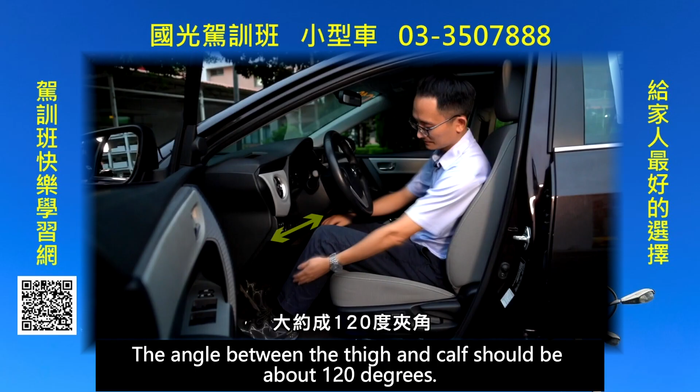The first step in adjusting the correct seating position is to adjust the seat forward and backward, and its height. The guideline is that both feet should not touch the lower edge of the platform, and your foot should rest lightly on the brake pedal. The angle between the thigh and calf should be about 120 degrees. This way, you can provide enough braking force, and the transition between the accelerator and brake pedals will be very smooth.

As for the height adjustment of the seat, it should be as close to the ground as possible, while ensuring a clear line of sight. This way, the center of gravity is lower, which improves vehicle control. When the driver's seat safety airbag inflates, if the driver is too close, it can cause serious injuries. It is recommended to sit at least 25 centimeters away from the airbag.

The distance is measured from the center of the steering wheel to your sternum. Additionally, the closer the headrest is, the better head protection you will have. Therefore, it's not advisable to use a cushion on the seat back.

Teacher, I would like to ask how to adjust the rearview mirror. Not adjusting the rearview mirror before driving will prevent a complete understanding of the vehicles on both sides and behind. When turning or changing lanes, it can easily lead to misjudgments regarding the presence of other vehicles, causing traffic accidents.

Furthermore, the cleanliness of the mirrors should also be noted. The interior rearview mirror should primarily provide a view directly behind. It is recommended that in adjusting the side rearview mirrors, 1/5 of the inner circular part of the mirror should show your vehicle. The remaining part should show what is behind the vehicle and the status on the side of the vehicle. Teacher, I have one last question.

How should the steering wheel be adjusted? If the steering wheel is not properly adjusted, it will affect our steering maneuverability and can create ergonomically incorrect movements, leading to hand, back, and shoulder soreness. This is not good for long-distance driving.

After watching the video, let's move on to our course: understanding vehicle structure, the driver's cabin, and the dashboard.

We see this diagram. There are two dashboards above. The one above is a typical fuel vehicle dashboard, and the one below is a hybrid vehicle dashboard. What's the difference?

It has an engine RPM gauge. Everything else is about the same. Each type of vehicle's dashboard is generally similar. However, the more warning lights there are on the dashboard, the more testing systems it will have.

The color distinctions generally include blue, green, yellow, and then red. Generally speaking, the red part means you need to address it immediately. The yellow part can usually wait to be addressed. Green indicates normal, you probably don't need to deal with it right away. Green represents normal. There are about these colors.

Let's take a look. The remote control part is the remote control on your body. As long as you get close to the car door, that door handle can open the car door. Its design is the door handle; it has a sensor that can detect you. If the remote is on you, the car door can be opened, and if you touch it again, it will close the car door. You can also use the button.

There are buttons on the remote, and the remote has a key on it. Why is there a key? Because it's worried the remote might be out of battery. You can use this key to open the car door.

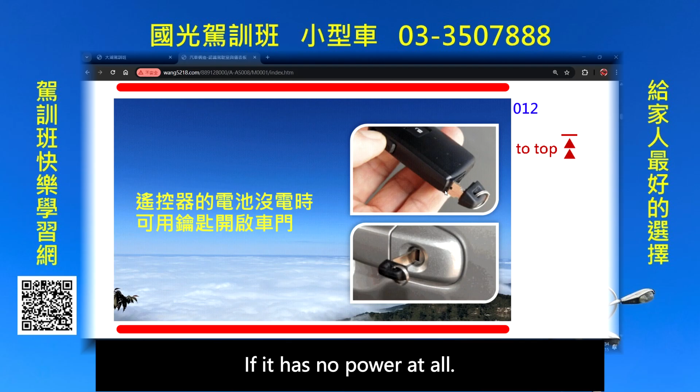But if your remote is completely out of battery, you still can't start the vehicle. You just need to change the battery. According to the coach's experience with this car, which belongs to the coach, when it was new, the battery lasted about 4 years. Later, after changing the battery, it ran out after 2 years.

Just sharing this with everyone. Changing the battery isn't too expensive. The first time I changed it was $60. This time it's going to be $80.

The remote battery can drain due to weather factors, and then you can't open the car door. This is a situation I encountered in the mountains. I woke up in the morning and the remote couldn't open the car door, because it was too cold last night. After the weather warms up, you can open the car door again. This is to let everyone know that in this situation, after you go down the mountain, you should change the battery, because it has already lost a lot of power.

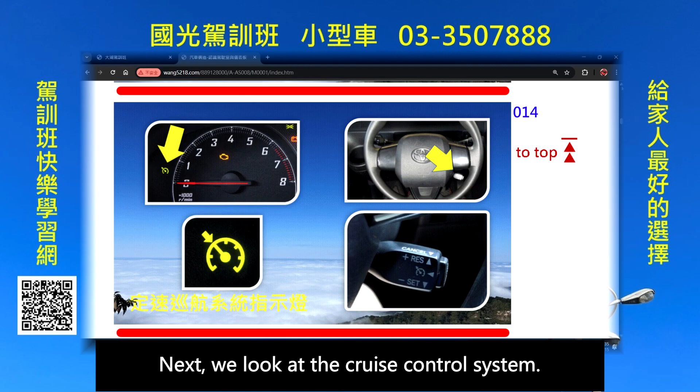Next, we look at the cruise control system. This car has a cruise control indicator light. Everyone driving on the highway, what do you fear the most? Speeding. Imagine if there is this system - you set it at 100, then it maintains that speed. It won't overspeed, isn't that great?

Generally, they set this system for driving, if there is a situation.

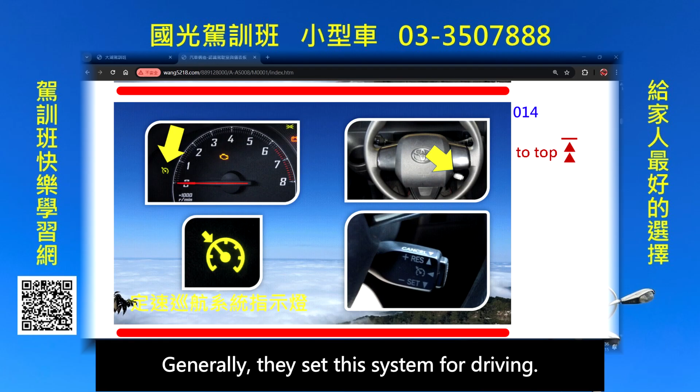There's another question I want to ask you, students. When you set it, it maintains a fixed speed. At this time, where does your right foot go? Usually it retreats. What happens if the right foot retreats? If something happens and you need to brake, you have to choose between the accelerator and brake. What if you hit the wrong pedal? Does that lead to a crash?

So I want to remind all students of something - you should develop a habit. Keep your right foot off the accelerator pedal. It should rest on the brake pedal, ready to brake. I'll say it again: when you drive, you should develop a habit. Keep your right foot off the pedal. It should rest on the brake pedal, ready to brake, not pulling back.

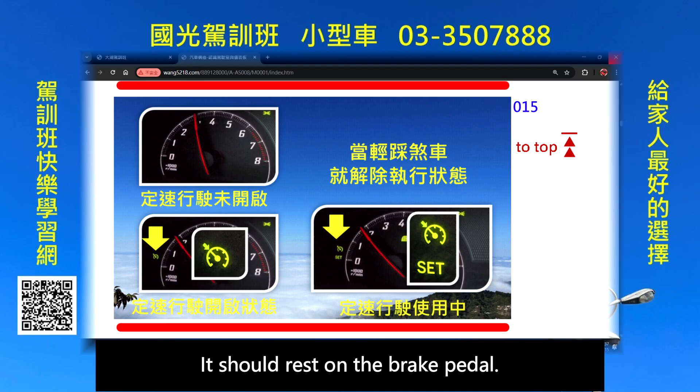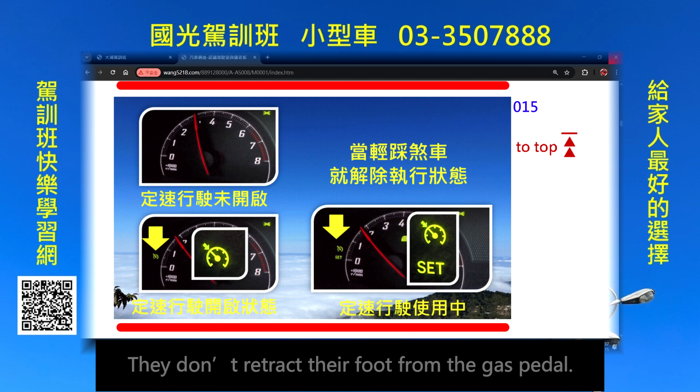So remember the movement the coach just mentioned. Make it a habit from now on.

Next, new cars all have tire pressure monitors. The tire pressure monitor has been discussed before about tires, so let's briefly mention it here as well. When the light comes on, it means one of the 4 tires has insufficient pressure. As previously mentioned, it lights up when it's about 5 psi low.

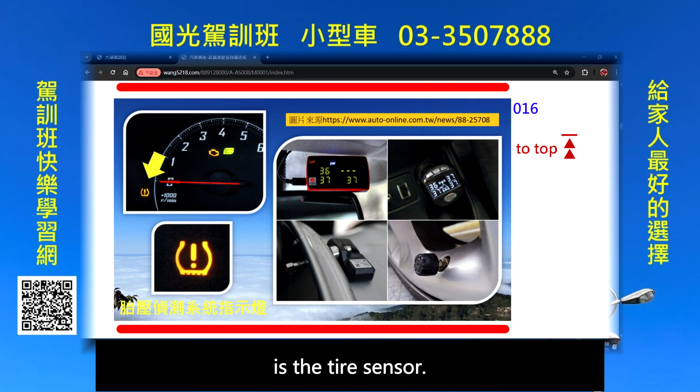Its design typically has 3 types. One type is installed inside the rim. Another type is installed on the outside of the rim, and the other is the tire sensor, which detects differences in tire rotation speed. The type outside the steel ring senses the difference in tire rotation speeds.

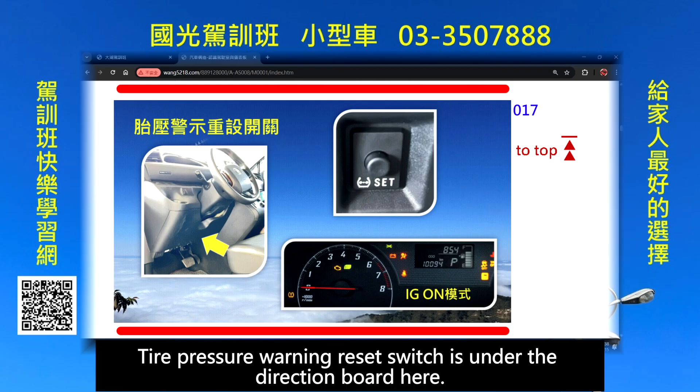He just indicated there's a switch here - the tire pressure warning reset switch is under the steering wheel here. If we're using the stick, let's not touch it. This is the explanation from the user manual. This part will be handled by the manufacturer, so let's not mess with it.

Tire pressure for our car - look at the A pillar and the B pillar. The B pillar has a sticker here. The sticker will tell you the size of the original manufacturer's tires, and also the tire pressure that needs to be filled, how many pounds. As for the tire pressure gauge, we usually don't have one at home.

Where can you find a tire gauge? At maintenance shops, tire shops, and also gas stations, with free water and air refill. Where is this? At the gas station in the rest area, it also has a place for you to inflate tires, and also a free water refill place. This is the inflating equipment.

In the future, when you drive in mainland China, what should you do when you find there's no air? To be precise, it's not about finding there's no air - you should regularly check the tire pressure. Maintenance shops, gas stations, and car rental places all have inflating equipment. Or you can buy one of those for your car.

An electric inflating device - my family bought one a while back, and it's kept in the car.

It's rarely used since it can inflate, has a warning light, and can also serve as a flashlight. It's great, right? But if left unused for a long time, it might break, especially electronic products. So you should learn in advance.

Before you buy something, consider carefully. Is your usage rate high? Not to say don't buy it, it depends on your usage rate.

Let's take a look at the gas station inflating equipment inside the rest area. This is its structure, this is the valve. When we're measuring tire pressure, we just press down on the valve and it will detect the pressure, then you'll know what the tire pressure is.

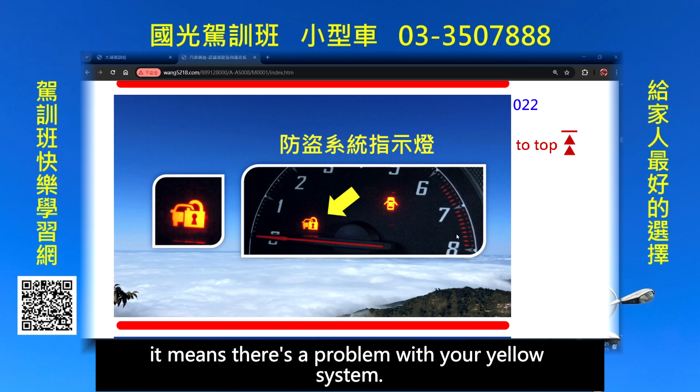Next, let's see if this light is red. The anti-theft system indicator light, when this light is on, it means there's a problem with your system. Similarly, you should check it regularly.

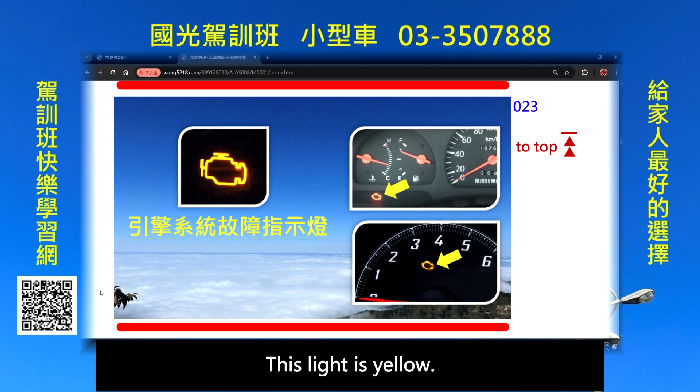Engine system fault indicator light. This light is yellow, it means you don't need to handle it immediately, it's okay to delay, because this needs to be checked with a computer. There might be issues with that system, it could also be a computer malfunction, or other sensors might have problems. All these possibilities, ultimately you still need to go for a computer check to troubleshoot.

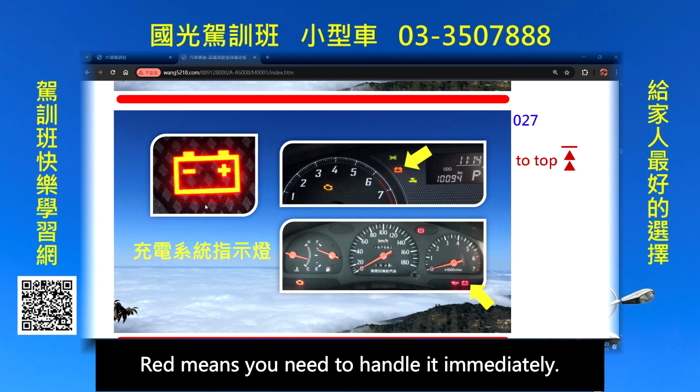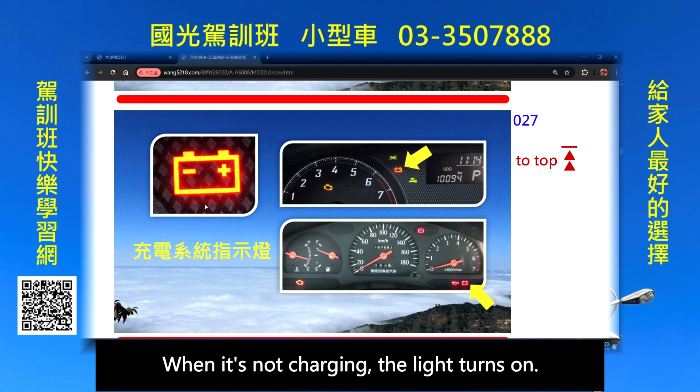Charging indicator light, if this light is on, it's red. Red means you need to handle it immediately, otherwise you'll run out. The charging indicator light means our car has an electric generator, the generator isn't generating power. When it's not charging, the light turns on, and it can stall. Because the battery still has some power left, it can supply power for ignition, until it runs out and the battery is empty. Then it's useless.

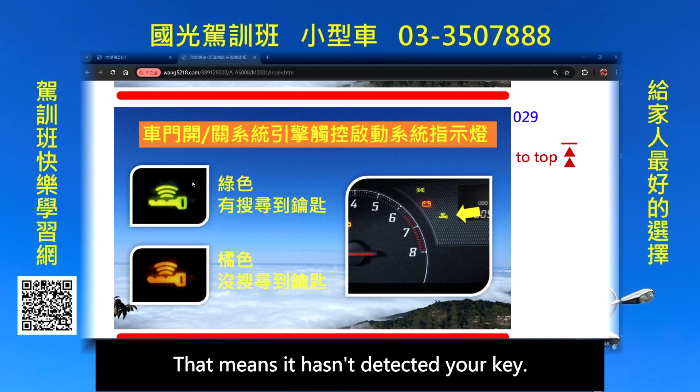Engine touch start system indicator light. When you start the engine, a green light will appear if it detects your key, and you can smoothly start your engine. If you press the start button and it shows an orange light, that means it hasn't detected your key, or your key's battery is dead. It still won't start, and this orange light will appear.

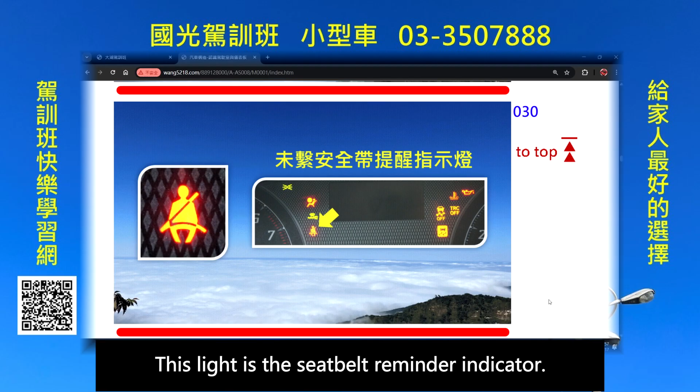This light is the seatbelt reminder indicator. When you haven't buckled your seatbelt, this light is on, and next it will sound an alarm.

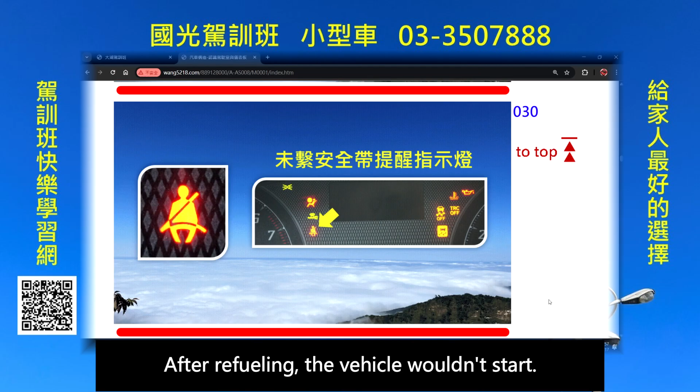I once met a gentleman. He drove to a gas station to refuel. After refueling, the vehicle wouldn't start. After several attempts, he found out it was because he hadn't buckled his seatbelt and couldn't start the engine.

Regular maintenance is necessary because if the oil is insufficient, the temperature will rise and parts will wear out. What is warming up the engine, and why do we need to warm it up?

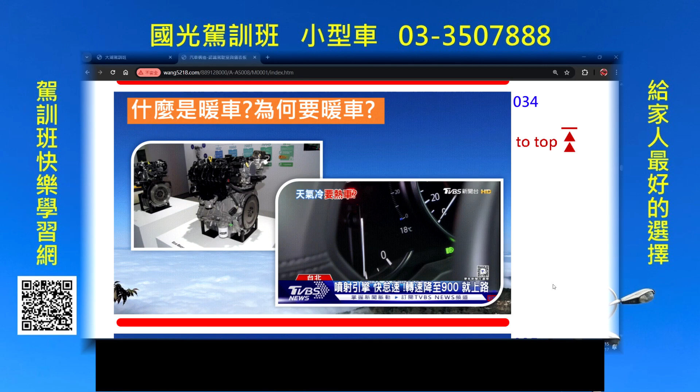Let's take a look at this news report: preparing to take the beloved car for a stroll. Many people often just wait after starting, simply standing still. This car looks like an old model, but it's actually a 90s car, about a car from 1989 or earlier. This model has a carburetor, so as I mentioned, it needs warming up.

The key is to see when the water temperature reaches normal temperature. Right now it's just warming up, but it will reach normal temperature level, and the condition of the car's fuel lines will be better because it reaches operating temperature. The owner says you must wait for the engine to run smoothly before driving.

very reasonable. This notion arises because older cars before 2000 have a carburetor in the engine, responsible for fuel supply, allowing the engine's air and fuel to mix. But its fuel supply accuracy can lead to air pollution. Today's car models have long been replaced with computer controls.

No need to warm up, partly to avoid pollution. On the other hand, the new car's computer is very smart, it sets everything up for you in real time. This car is relatively newer, so let's do some starting tests right away.

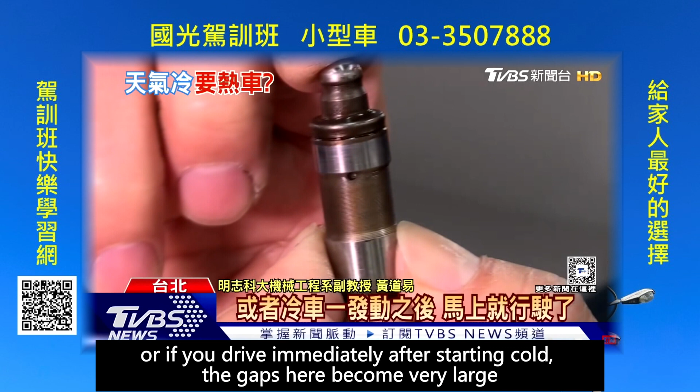The entire operation will produce a much louder sound. So at this time, fuel consumption will be very poor, and it will generate more exhaust emissions.

The car's parts are all metal. Each part will wear out from mutual friction when operating. Over time, it will certainly be prone to failure, especially when the engine is cold. The oil flows back down and relies on the startup to pump back into the engine, so oil truly controls the lifeblood of the car.

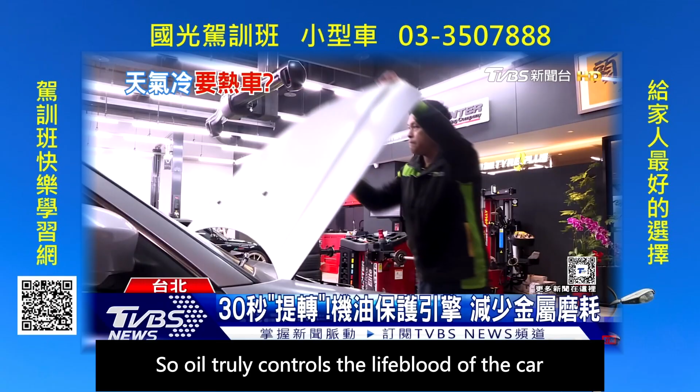If a driver forgets maintenance and only maintains after 20,000 kilometers, the oil is already gone. Actually, you can still drive, but if you want the car to last and keep it longer, maintaining it regularly is essential.

If you maintain your engine well, there are many cases abroad reaching 1 million kilometers, and the engine is still fine. If you're not diligent with maintenance, some people only make it to 70 or 80,000, or over 100,000, and the engine fails. Whether you maintain every 5,000 kilometers, or change the oil at 10,000 kilometers, both are fine. It just depends on the owner, whether you want to do one major repair, or change oil frequently to properly maintain your beloved car.

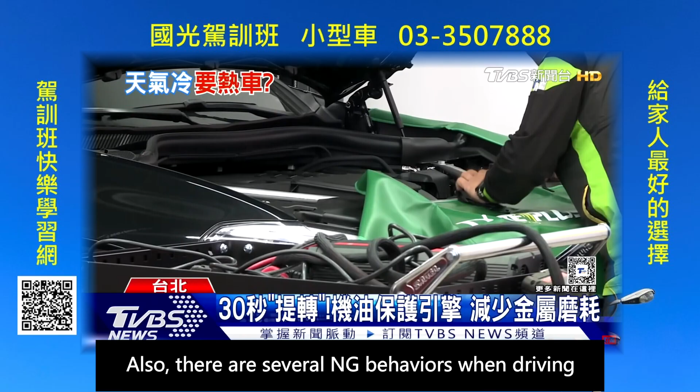Also, there are several NG behaviors when driving. Don't idle too long, as it easily causes carbon buildup or gets exposed to sun or rain, which also makes the rubber seals prone to cracking. Heavy acceleration and heat, braking and opening windows at high speeds, all waste fuel and damage the car.

If you want to avoid frequent repairs for your car and keep your wallet safe, remember these points. After watching the previous video, the purpose of warming up is like stretching before swimming, to prepare beforehand.

It's actually the same principle. This car has a blue light, called the low engine coolant temperature indicator. When you just start the car, this light is on, telling you the engine is currently in a low state. You need to warm it up a bit. Wait for this light to go out before you can step on the gas and drive off.

Now let's take a look and observe when it just started, whether its engine RPM increased. Observe it when it just starts moving. If its engine RPM gauge increases, and then the light went out, did the engine RPM decrease?

Okay, there's a countdown here. I see there's a countdown, 5 seconds. Now the engine RPM has increased. It has increased, but the light is still on. Let's take a look at when the light went out, and how many seconds in total. Did the engine RPM drop? It is currently at 1100 RPM.

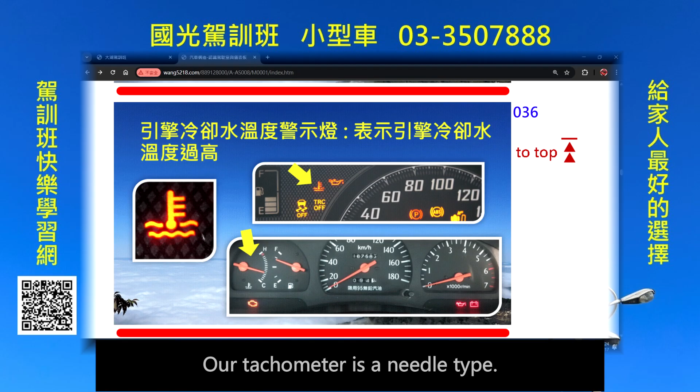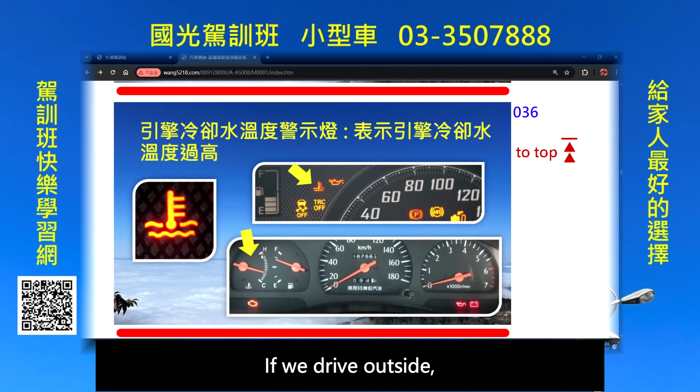Our water temperature gauge is a needle type. Generally speaking, it's normal for the needle. If it rises, likewise, you need to stop by the roadside to rest, and get a coach to handle it. If we drive outside, it's the same - pull over, don't keep driving. If you continue to drive, the engine can easily get worse.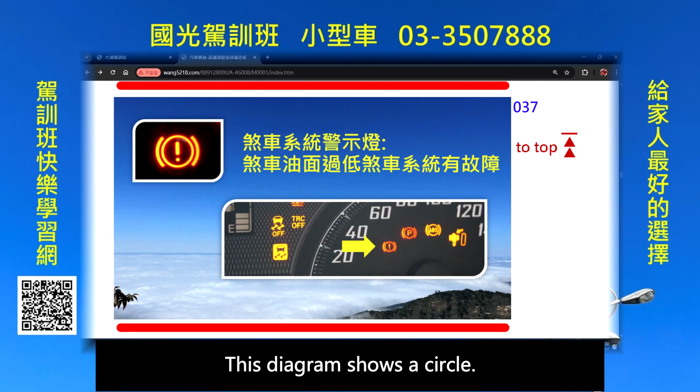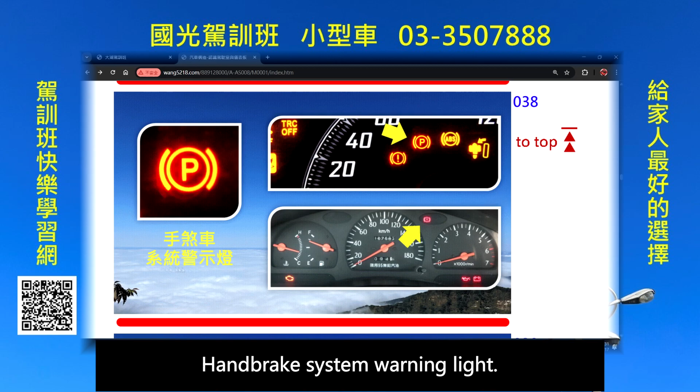Handbrake system warning light - this means if you haven't released it, it will light up. If the handbrake is pulled tight, the car won't be able to move... the answer is it can move. Why? Because we have front-wheel drive, the back tires don't move. Only 2 points of support are left. The area of the 2 points of support is about the size of 2 small coins. So if your handbrake isn't released, the car can still move.

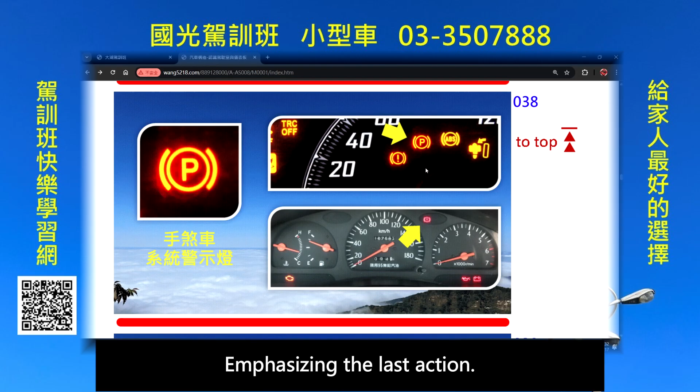However, your brake pads might get worn out, the tires will also wear out. Therefore, when we check the vehicle, the last action is to release the handbrake, emphasizing the last action - release the handbrake. This is to confirm it has been released. So everyone, in the future, when driving, develop this habit.

Next, let's understand the Hill Start Assist control system. What is its operating situation?

After watching this system, dear students, when practicing driving, if you have this system, you won't need to use the handbrake for hill starts. After removing your foot from the brake pedal, it will hold your vehicle in place. Then, as you move your foot, the vehicle won't roll back. Then, when you accelerate, you can go straight up.

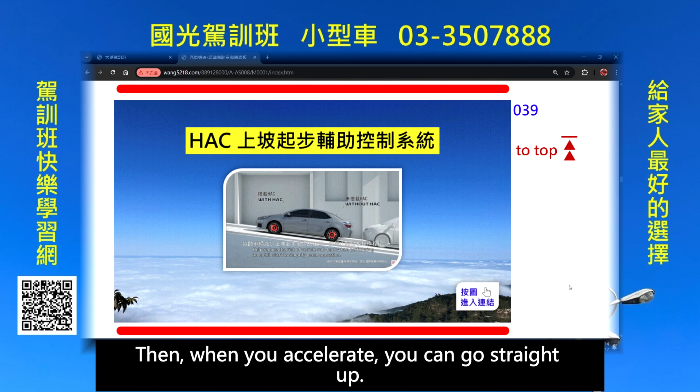However, the coach wants to remind everyone of one thing - the hold time is not continuous. It will last about 2 to 3 seconds, giving you enough time to move your foot to the accelerator. Accelerate and go up. It doesn't mean that if you release the brake, you won't slide. You still will slide, it just pauses for about 2 to 3 seconds.

From this video, we can see one thing now. We have many parking lots in Taiwan - parking towers. The car in front is on the slope, let's not go up yet. Because our car has this system, we won't be sliding back. But that doesn't mean the car in front has the same system. We've seen reports on the news too.

Suddenly reversing, the car behind can't stop in time and crashes. So whose fault is it?

Don't follow so closely, you're too close to the car in front. You're not keeping a safe distance. Here you also need to choose in advance. No matter when you're driving, you must maintain a safe distance and space.

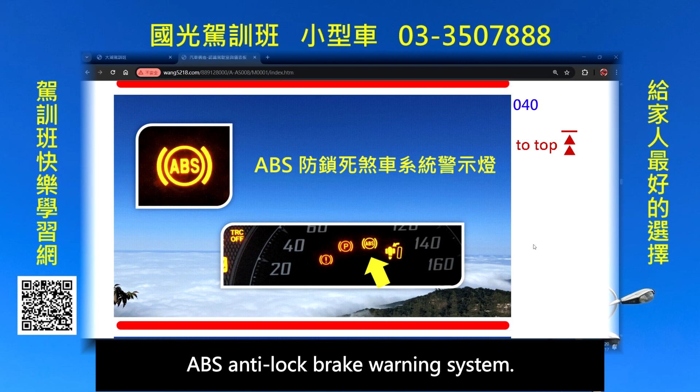ABS anti-lock brake warning system. It keeps the tires from locking up, because when we hit the brakes, if the tires lock up, the car will roll and lose control. This system uses a computer to control our brake fluid pressure. It enables pulsing brakes, and let's take a look at its operating mode.

After watching the video on the ABS anti-lock brake system, this system has become standard equipment. Currently, all vehicles are equipped with this system. This system helps us apply brakes when speed is high. Based on the animation we just saw, when he hits the brakes hard, it helps with pulsing brakes.

It can adjust the steering wheel to avoid danger, because if the wheels lock up, you won't be able to steer. If it applies pulsing brakes, your car can easily steer. So, a reminder to everyone: when we're driving fast, you shouldn't turn the steering wheel too much. Being too aggressive can also lead to losing control.

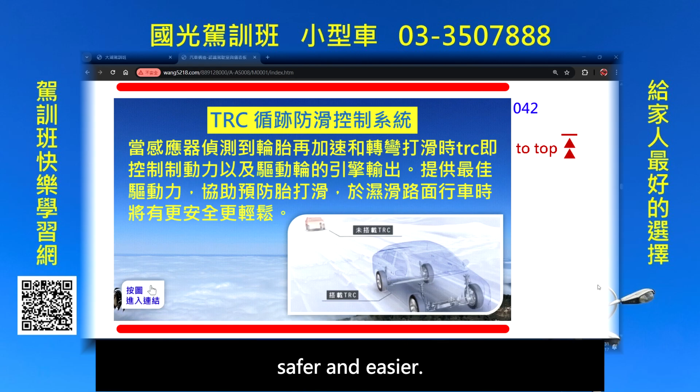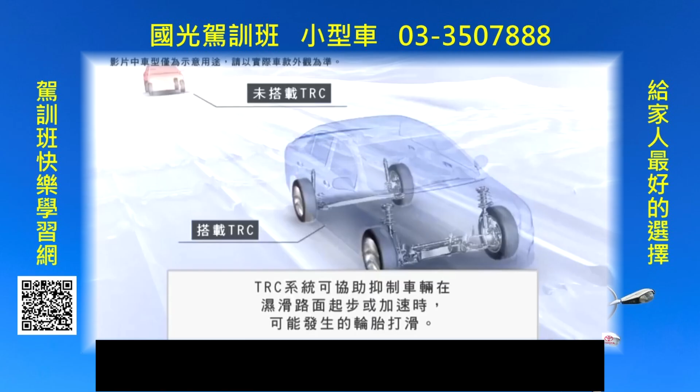Driving on slippery surfaces becomes safer and easier. Now let's look at the animation of this system. It means when starting on a slippery surface and accelerating, tire slipping may occur. We'll see that with and without.

So when you step on the gas, it detects the slipping phenomenon. It will slow down your engine RPM. From here we can see the bottom shows the controlled throttle. Original state, after that, it has stopped.

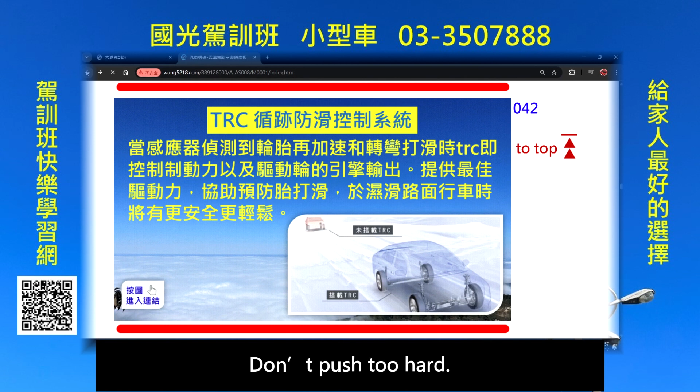So students, when you're slowly accelerating, pay special attention to throttle control. You need to learn to manage the gas. Press gently, don't push too hard. If you push too hard, it easily leads to slipping and losing control.

There's an indicator light here, it can be turned off. The traction control system indicator light. Let's see how it operates. There needs to be a warning light. It says if this happens,

stuck in mud or snow, this system can reduce engine RPM, transfer power to the wheels. Pressing the button can deactivate the system, making it easier for the vehicle to get unstuck. In other words, this system can be activated or deactivated.

Next, let's look at the vehicle stability control system. It also discusses this here, or in off state.

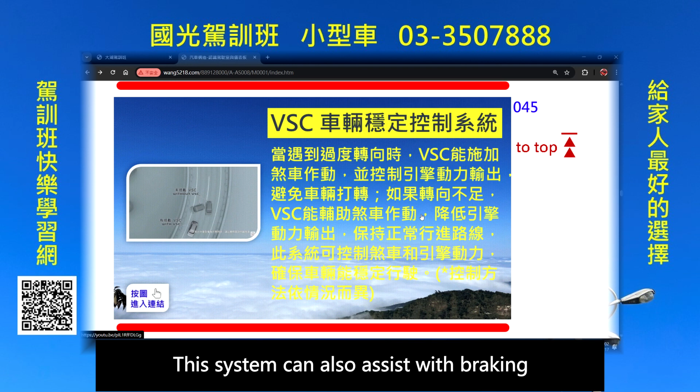When encountering oversteer, this system will help us brake, help us slow down, and control the engine power output to avoid the vehicle spinning out. If there is understeer, this system can also assist with braking, reduce the engine power output, and keep the vehicle on a normal driving path. It can control braking and engine power to ensure stable driving.

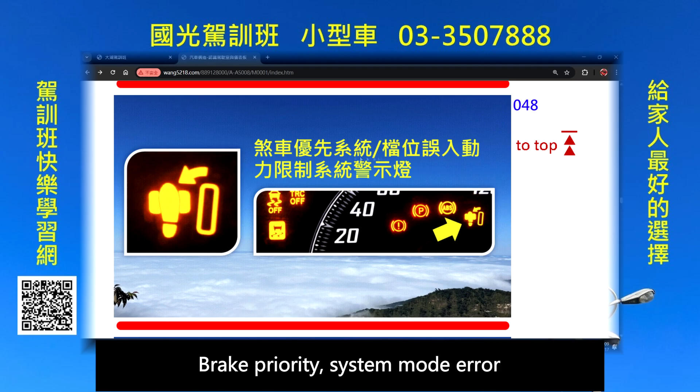Let's take a look at how this system operates. It means to say, when this system is in operation, this indicator light will flash. Brake priority system mode error. Power limitation system indicator. Electric power steering system warning light.

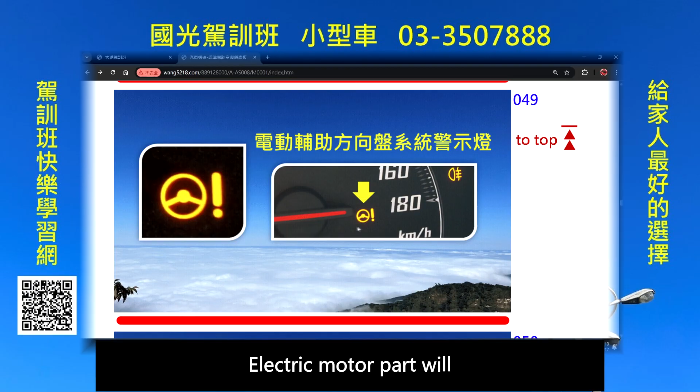When this light comes on, your power steering electric motor part will fail to function. At this time, your steering wheel will feel very heavy, but it can still be turned. You can still turn on the front fog lights. If there are front fog lights, it implies there are rear fog lights.

Okay, this one is for thick fog lights. Did you see the thick fog lights? This is to remind everyone, choose to use fog lights when foggy, for front and rear fog lights. Police agencies will not actively stop to check.

However, the public can report if you are not. In fog, you cannot use fog lights without reason. Front fog lights and rear fog lights.

We see this picture is of a fuel gauge. When this indicator is on, it means your gasoline is low, time to refuel. Approximately how much is left? About 16 kilometers. Some cars may have about 8 kilometers left.

In the future, when driving outside, don't let this light come on. Gasoline running out can easily cause a breakdown, generally speaking.

The dashboard will show the gear position, fuel level, and mileage. There is also total mileage, and you can set the mileage from point A to point B. You can also find out how much fuel is left in your tank and how many kilometers you can drive.

Below that, this is traditional, just like our instruction vehicle. Generally, instructor vehicles use gasoline. The fuel gauge is needle style.

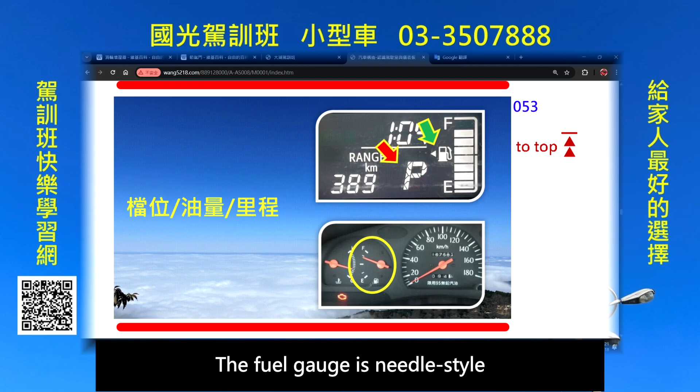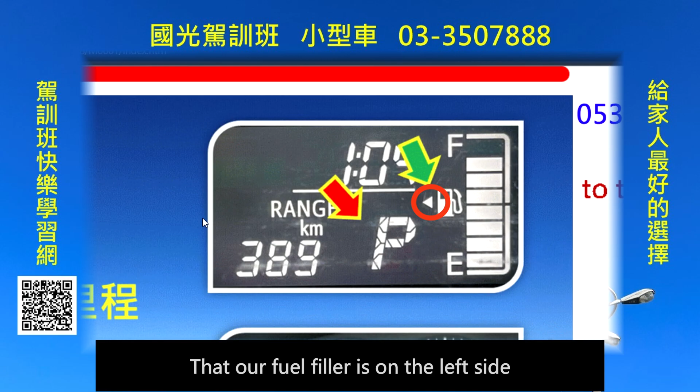There's also a temperature gauge, which is also needle style. There's a small triangle beside it. What does this triangle tell us? That our fuel filler is on the left side. If this small triangle is on our right, it indicates that this car's fuel filler is on the right.

The turn signal light, which we usually call a direction light - when the vehicle is driving and has to turn left or right or change lanes, it must turn on the indicator light early. The turn signal should flash.

The speed becomes faster. On the other side, if we signal to the right and the right side flashes faster while the left side flashes normally, what does this mean? The bulb is burnt out. It needs to be replaced immediately.

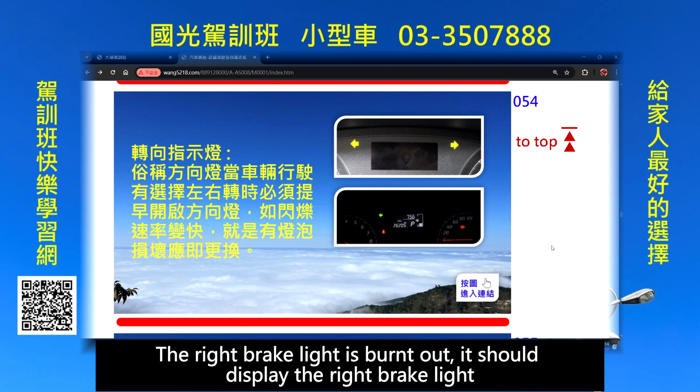I think the car manufacturers put so much effort into designing many functions for the bulbs, yet they won't design for the left headlight being burnt out. Also, if the left headlight has a problem, or the right brake light is burnt out, it should display that on the right - I think that would be better. Otherwise, they've designed many functions for anything you can think of, in today's cars. It's not that they can't do it, they definitely can.

That's the turn signal, that's the headlights - why wasn't it done? It should be done in the future too.

How do you know if the engine is running? One: listen to the engine sound. Two: feel the car noise. Three: give it a little gas. Four: check the engine RPM gauge.

Check the speedometer. When listening to the engine sound, you can't really hear it - the engine is very quiet, you can hardly hear anything. Feel if the steering wheel is vibrating - because the engine sound is very quiet, you can't even feel it's running.

Three: give it a little gas - if the engine is running, it will accelerate. If it's not running, you won't feel the acceleration. So this action is actually incorrect too.

Four: check the engine RPM gauge - we will look at it later. Five: check the speedometer. The vehicle is stopped over there, it's not moving - look, the speedometer is at 0. So the final answer is the fourth item: you need to check the engine RPM gauge.

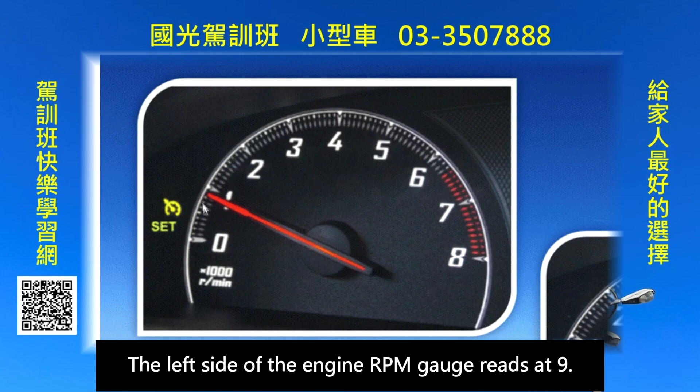Let's take a look at the engine RPM gauge. The left side of the engine RPM gauge reads at 9 - this means it's turning. 900 RPM, the engine is running. The chart below shows 0 RPM - that's the state of having no RPM, it's off.

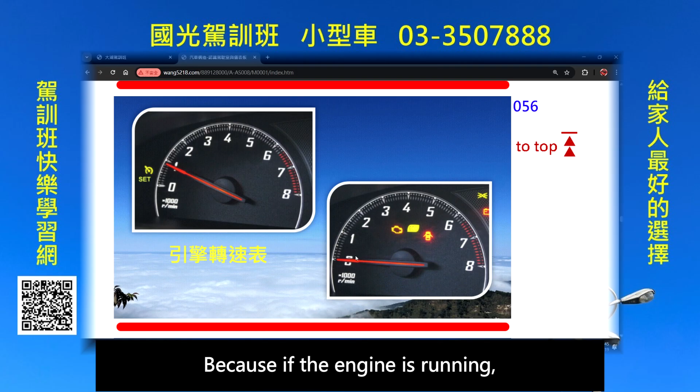Why observe this action? Because if the engine is already running when you start the vehicle, the starter motor can easily break. This is a reminder for everyone. So at the instant we start the vehicle, we must confirm the engine is running. The most accurate way is to check the RPM gauge.

Hazard warning light button - when do we use it? When the vehicle is on the road and you need to alert the vehicles behind you that we're slowing down, don't hit me - you should press the hazard warning light button. This also applies to heavy rain or fog - just the same, press the hazard light button.

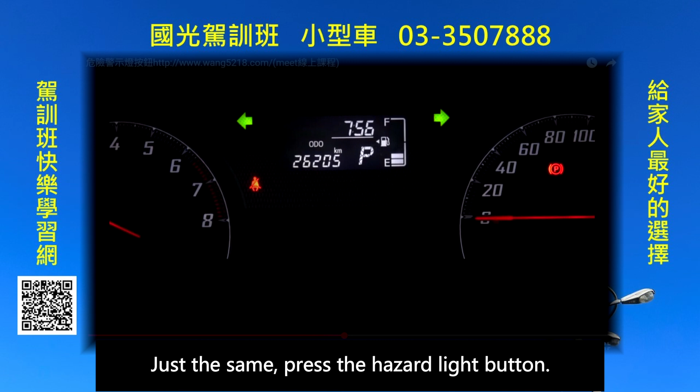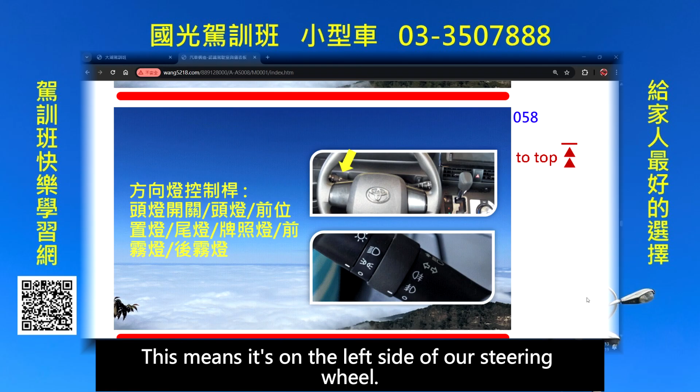Control lever - this means it's on the left side of our steering wheel. It can control our turn signals. Usually the lights are part of this control lever. Now let's see how it operates. All right, this is the low beam.

Next, switch to the high beam. This means the bright lights. Push forward for the high beams, and it switches back to the low beam.

This is the front fog light. Next is the rear fog light. All turned off, fog lights turned off. The lights are all off too.

If you tilt it up, it's the right turn signal. If you tilt it down, it's the left turn signal. When using the turn signals, don't use too much force. A gentle push will do.

Next, this is the high beam flash. You must know how to do this, because sometimes we need it while driving.

Turn on the hazard warning lights. All 4 corner lights will turn on. Remember to turn them off, because your turn signals won't work if activated.

After reviewing the turn signals, headlights, and the operation of the low beams, let's take a look at the windshield wipers, how to turn them on and off, and how to activate the washer. First action is to spray water.

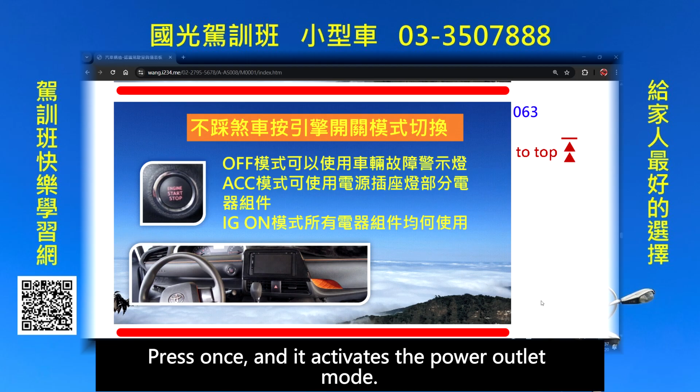The first mode is when our engine is off. You can use the vehicle's malfunction warning lights. Press once, and it activates the power outlet mode. Press once more, and it enters the mode where all electrical components can be used. Pressing again switches to the off mode.

Next, let's look at the traditional ignition mode, started with a key. For manual transmission, press the clutch to start. Step on the brake for automatic transmission. Shift must be in P or N gear.

The first section, turn on the electronics: audio system. Switch to the second section, turn on the measurement system, power switch on the dashboard, all warning lights will illuminate. Enter the third phase, activate the engine.

After the engine starts, release your hand. The key will automatically retract. If it doesn't retract, it can damage the starting system. When turning off the engine, turn back, then push inward. Turning back allows you to remove the key.

For automatic transmission, there's a forced shifting button. Why does an automatic car need forced gear shifting? Because for an automatic car, when the vehicle's battery is out, the gear shift lever cannot move. So forced shifting is necessary, this way the car can move out. So it has this design.

Fuel cap release is generally located beneath the driver's seat.

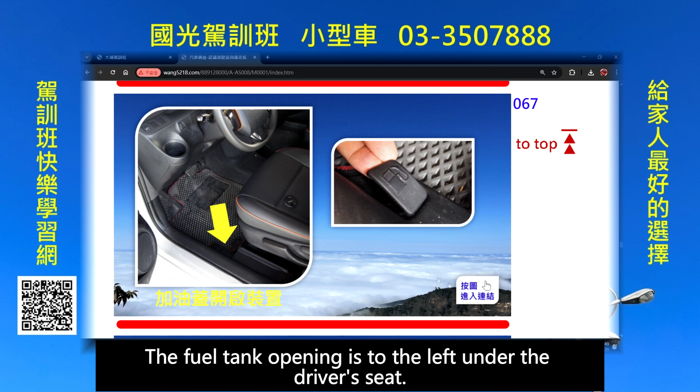The fuel tank opening is to the left, under the driver's seat.

The switch for the outside rearview mirror and windows. The power window switch for the car door is designed next to our left door.

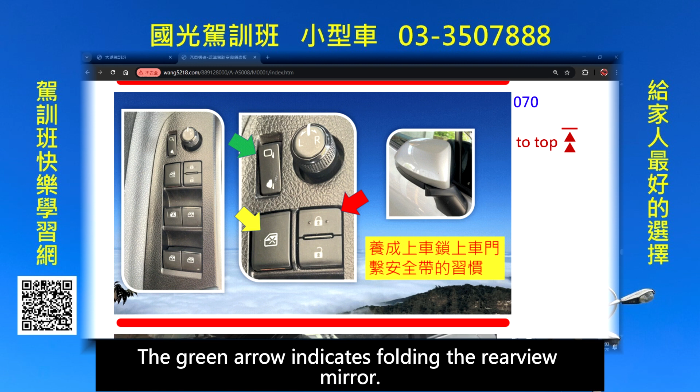The green arrow indicates folding the rear view mirror. The yellow arrow indicates this button, which prevents them from adjusting themselves.

The red arrow indicates the central locking. Pressing this button will lock all 4 doors, and pressing below will unlock them. When driving, lock all 4 doors, because it's safer that way.

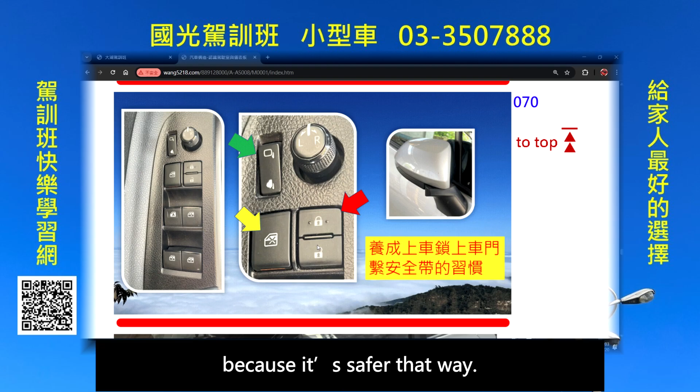Folding the side mirrors, a reminder to all students: if your car has power mirrors, you should fold them up when parking so they won't get damaged if bumped. These are the adjustments for both side mirrors. Adjust it left or right first, then adjust up and down, left and right.

Left and right sides. The rearview mirror adjustment has been discussed in previous videos. However, what we need to talk about here is the middle rearview mirror adjustment, because by its design, the angle differs in daylight. Let's take a look.

Why does the angle differ during the day? Let's take a look. In the evening, press the mirror downwards so the light's rays are refracted properly. During the day, move it upwards so you can see the cars behind you clearly. At night it will be very bright, so we need to angle this mirror downwards. In other words, the angles are different for day and night.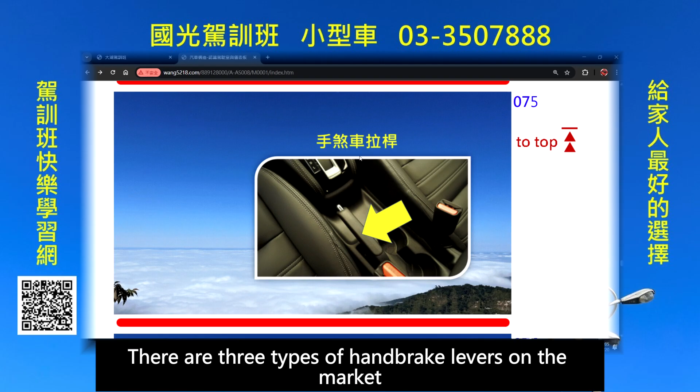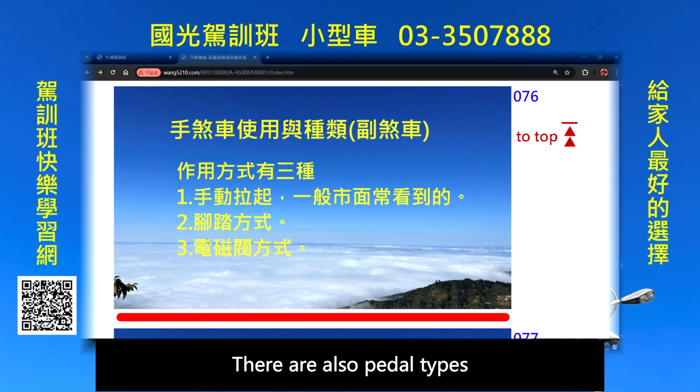Now let's look at the handbrake lever. There are 3 types of handbrake levers on the market. The most common type in our family cars is the manual pull-up type, which is generally what we often see. There are also pedal types, and another type is the electromagnetic valve type. Their design is to stop the rear wheels as a safety design, preventing the vehicle from moving after parking.

Drivers should develop the habit of pulling the handbrake tight after getting out of the car. When starting off, make sure to check if the handbrake has released.

Let's take a look at the air conditioning display, as well as the air conditioning system. This top part shows the interior temperature. The bottom part is for adjusting the air volume, and to adjust the temperature, you can do it here.

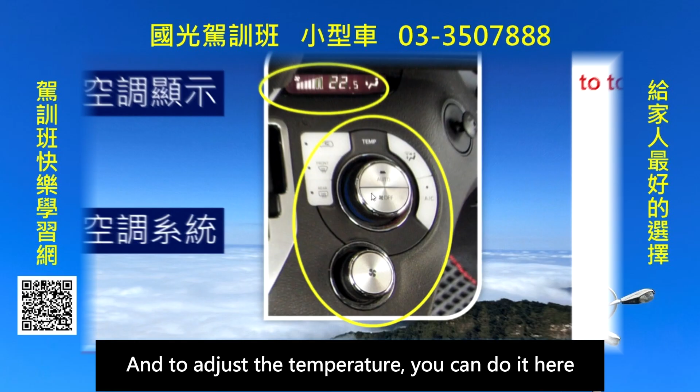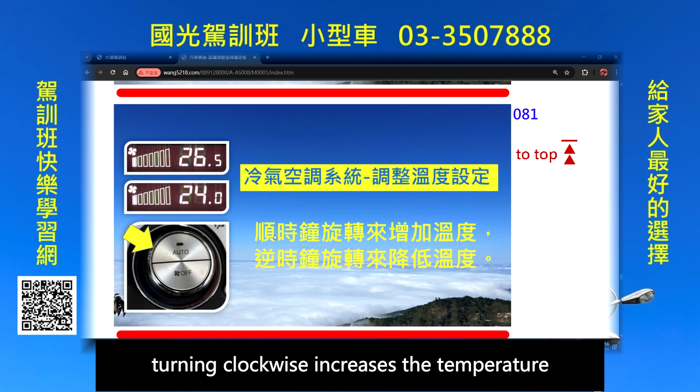The air conditioning system operates in automatic mode. Press the auto button to turn it on, and to turn it off, just press off. It's pretty simple to operate. For adjusting the temperature, turning clockwise increases the temperature, while turning counterclockwise decreases the temperature.

Next, this is the airflow volume for the air conditioning, which works just like our electric fan. Turning clockwise increases the fan speed, while turning counterclockwise decreases it. Now let's look at the airflow mode switch here. The switch has 4 modes.

The first mode blows air to the upper body. The second blows air to the upper body and legs. The third mode blows air to the legs. The fourth mode blows air to the legs and defogs the windshield. If you press it again, it will cycle continuously, 1-2-3-4, just like that cycling.

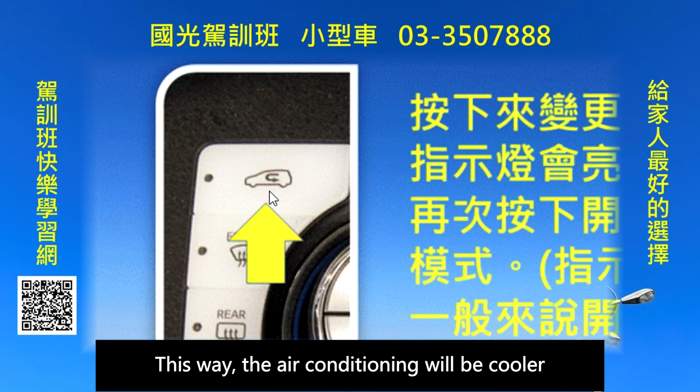This switches between outside air and the interior air circulation system, which allows you to circulate the air inside. After you press the button, because you're using the air conditioning, you don't want outside air to come in, so the air conditioning will be cooler. If you turn it off, outside air will come in.

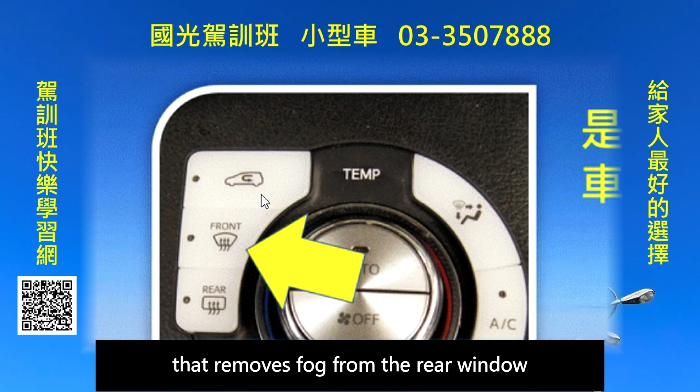Consequently, the air won't be able to defog the windshield effectively. The defogger is used to remove fog from the windshield and the front windows. That other one removes fog from the rear window. The defogger will turn off automatically.

After operating for a while, when the car windows fog up, the air conditioning should be turned on. If the moisture inside the car is high, the windows are more likely to fog up, which affects our driving safety. So press the AC switch, which can effectively clear fog from the windshield. If it's turned off, the windows may fog up easily. Using the interior air circulation mode also makes the windows more likely to fog up.

This is a reminder for us, also regarding the air conditioning part. You need to press the AC switch to get cool air, otherwise there will be no cool air, just airflow only. The air conditioning part varies by manufacturer, however the symbols are the same.

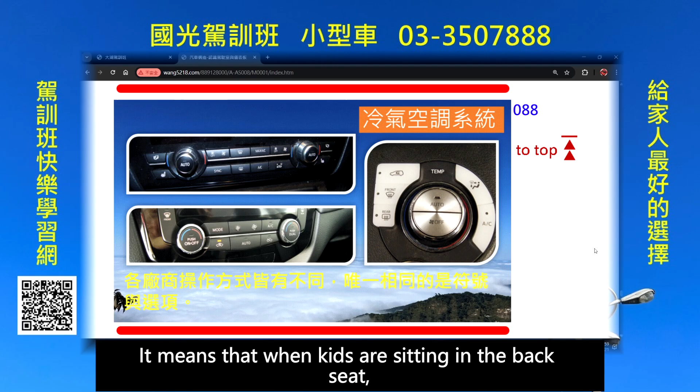Their symbols are identical. Now, the child safety lock - what is a child safety lock? It means that when kids are sitting in the back seat, they cannot open the car doors, as a safety design, because kids in the back seat might play around and press random buttons. So when we are out with kids, the back seat must have a child safety lock engaged, so kids won't be able to open the doors.

The same goes for the windows. Inside the car, we can use our control system so the kids can't open the car door, and the same applies to the windows. Locking this prevents children from pressing randomly, so other situations won't occur.

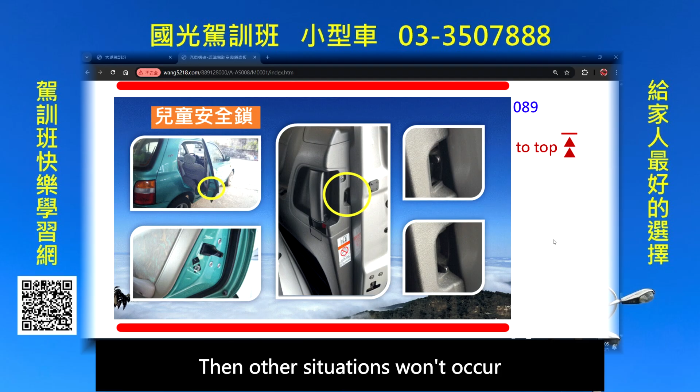This is the activation and deactivation of the safety lock. Once it's set, you can't open the door from the inside, but you can open the door from the outside. This is something to remind everyone of.

At the end of the video, we would like to ask a question. While the vehicle is in motion, on the dashboard, which of the following items will not display a fault warning? 1. Turn signal. 2. Brake lights. 3. Headlights. 4. High beams. 5. Taillights. 6. All of the above.

Today we discussed the basic model of the dashboard. Of course, different vehicles will have different warning lights displayed. Hope everyone gained something from this. So let's wrap up our lesson.